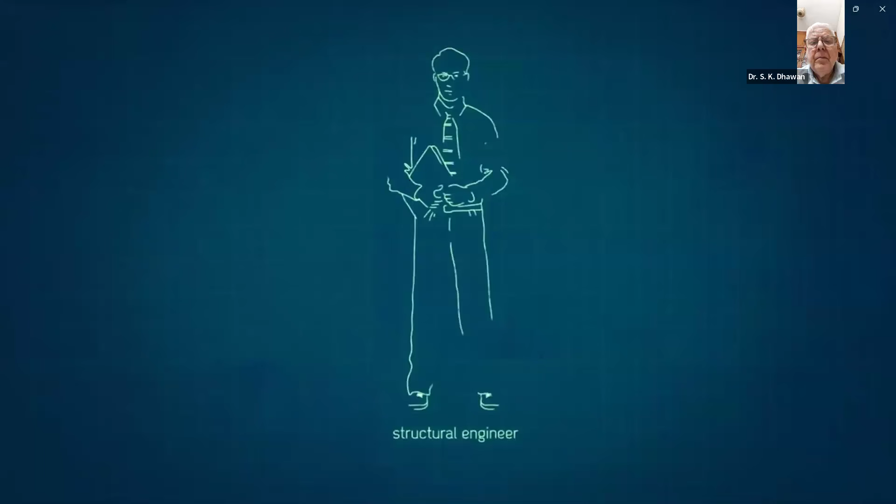The Indian Association of Structural Engineers, also known as IAStructE, was conceptualized and constituted in the year 2002 by a group of senior professional structural engineers from all over the country. IAStructE is registered under the Societies Registration Act 21 of 1860. IAStructE is a national apex body of structural engineers in India with a mission to promote the structural engineering profession and cater to the professional needs of the structural engineering fraternity. In the short span of 2 decades, the association has attained an eminent position in the professional field. Its membership is valued very highly in the profession.

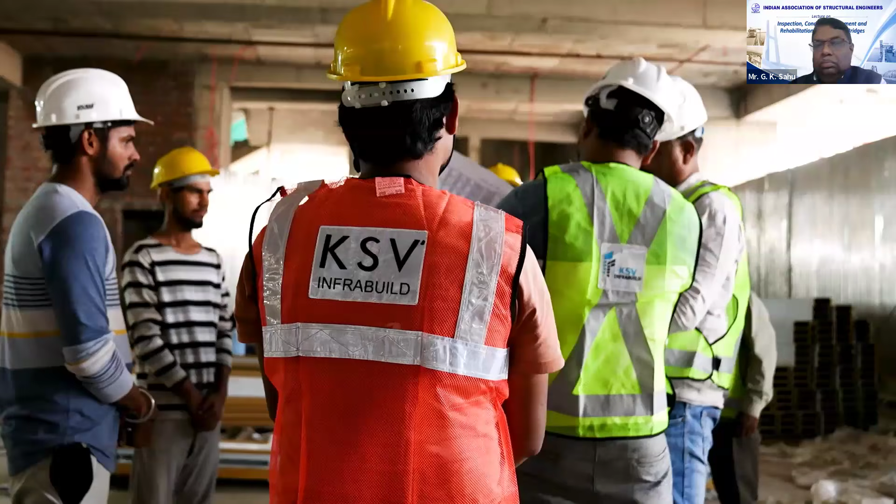Since inception, IAStructE has been led by eminent structural engineers like late Shri Mahendra Raj, late Shri Kumar Ghosh, late Shri Subhash Chand Mehrotra, Professor Mahesh Tandon, Shri Manoj Mittal, Professor R. Pradeep Kumar, and Shri Alok Bhowmick as its president. IAStructE is a permanent member of Engineering Council of India and interacts with the government on professional and policy matters related to civil and structural engineers. To expand its reach, IAStructE has collaboration with various international like-minded professional associations and institutions like IStructE, UK and FIB for strengthening global connections and professional exchange.

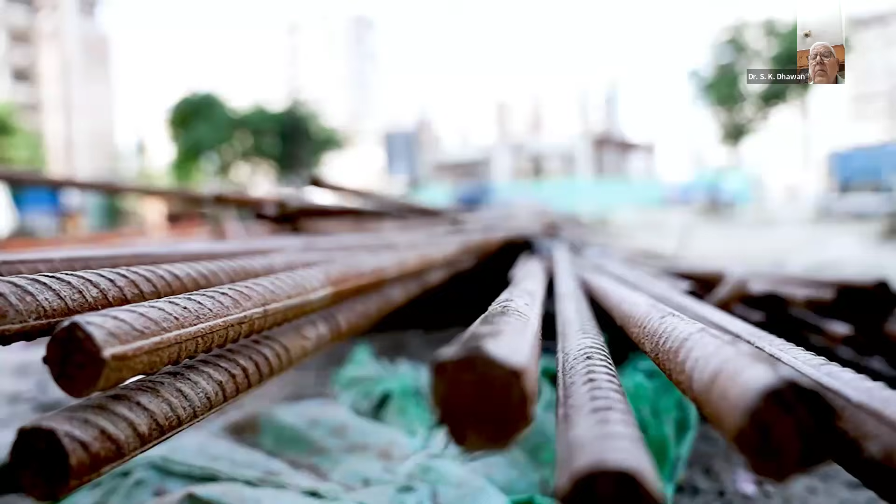IAStructE's prime objective is supporting and protecting the profession of structural engineering by upholding professional standards and acting as a mouthpiece for structural engineers in India. IAStructE endeavors to ensure that its members develop the necessary skill in structural engineering and work to the highest standards by maintaining a commitment to professional ethics and standards. IAStructE is actively engaged in organizing several continuing professional development (CPD) courses for structural engineers to help them update their knowledge and advance their career paths. It also conducts refresher courses for young and practicing engineers and student-oriented programs.

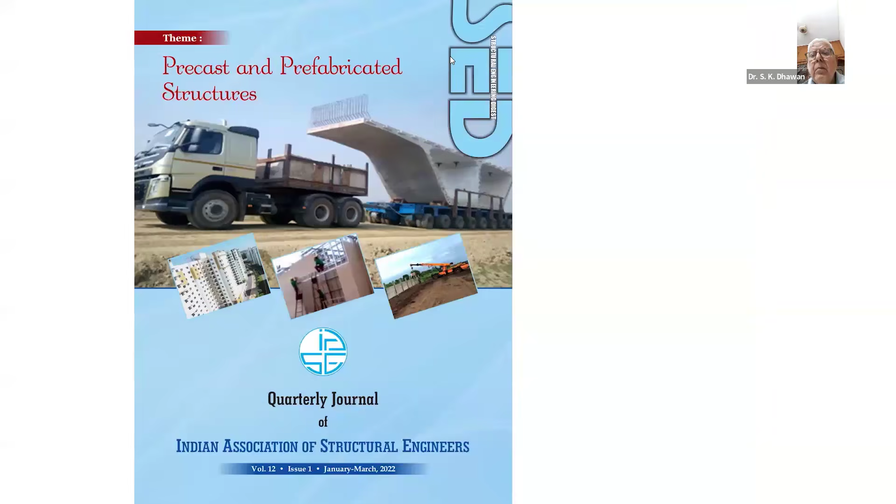Seminars, workshops, conferences, technical lectures and discussions related to the latest technological advancements and case studies are also organized regularly for members to enable them to continuously update their knowledge and skill set by interacting with the best minds from the industry. IAStructE's activities are widely appreciated and known for quality technical contents. IAStructE is also actively engaged in publishing its quarterly journal Structural Engineering Digest (SED), code commentaries, professional guidelines, monthly newsletter, and Crossfall, a unique quarterly newsletter that confidentially reports structural failures and the lessons learned from them. IAStructE's publications are becoming popular with time. IAStructE has representation in various technical committees of BIS and IRC as well. Its members are actively contributing to national code formulations.

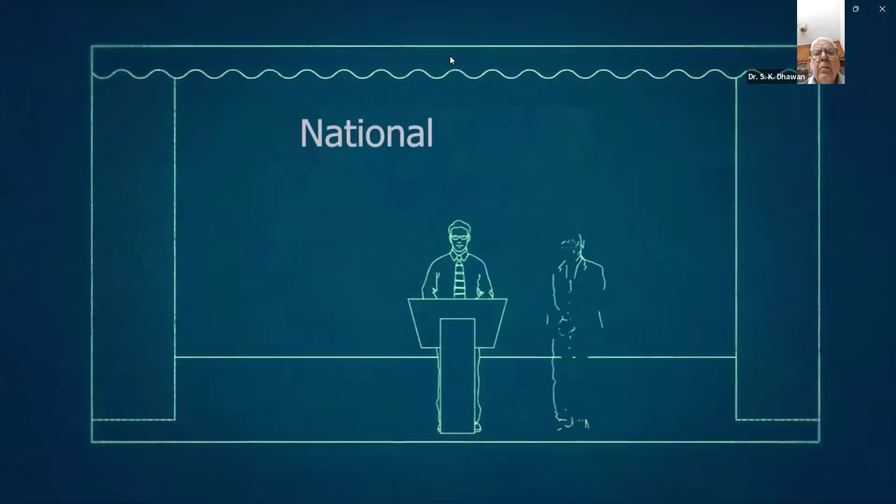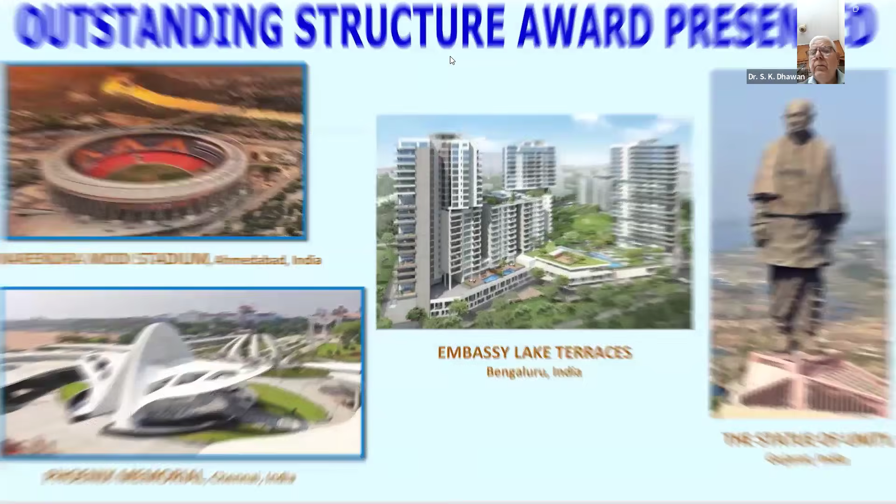In the year 2020, IAStructE started the National Awards competition to stimulate interest in the structural engineering field and to promote innovative thinking and creativity. The awards are presented to the winners in recognition of their outstanding contribution to structural engineering in the categories which include Outstanding Structure, Outstanding Structural Engineer, Outstanding Woman Structural Engineer, Promising Young Structural Engineer, and Best Master's Thesis in Structural Engineering. Reaffirming its commitment to professional excellence, IAStructE launched the accreditation program in 2023. This flagship initiative empowers practicing engineers to evaluate their competencies, identify growth opportunities, and strengthen the foundation for sustained professional success.

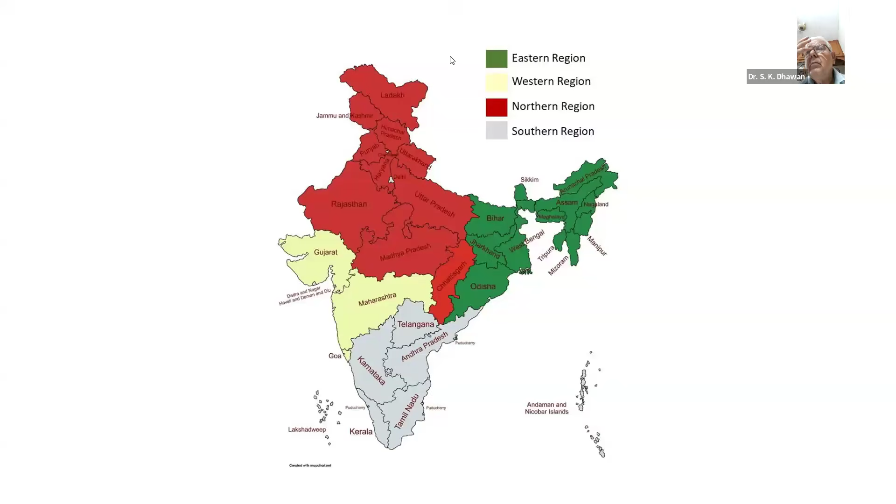IAStructE is currently operating from 4 regional centers, namely Eastern, Western, Northern, and Southern, having its headquarters in Delhi to inculcate the professional culture and provide hand-holding to the budding engineers. Joining IAStructE offers exclusive resources, mentorship, and networking with industry leaders. Members enjoy discounted registration for workshops, seminars, and events, along with discounted membership of FIB, opportunities for certification, career guidance, leadership roles, and enhanced professional recognition. IAStructE has its student chapters in several leading engineering institutions as well.

Membership of IAStructE is open to all civil and structural engineers engaged in the structural engineering profession. Members are elected based on their qualifications and experience in different grades as per eligibility requirements prescribed in the bylaws. Each application is carefully scrutinized before electing the members.

Changes observed in the performance since construction can serve as an indication of some sort of distress in the structure. Thus, instrumentation helps in monitoring the design parameters and in the assessment of the current health of the structure, so as to adopt proper remedial measures at an appropriate stage.

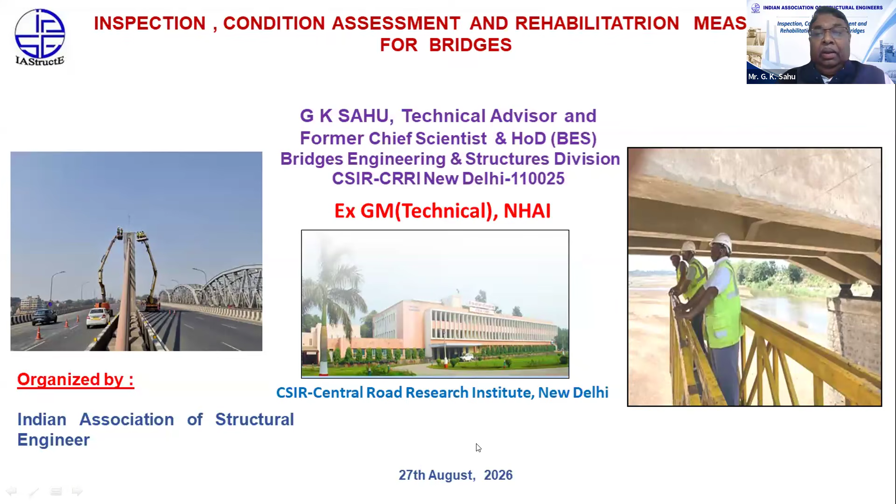Good evening, friends, I welcome all of you in this webinar. For any structure, before recommending anything, I request all of you to visit it at least once, for at least 1 hour. Only then kindly recommend anything, because relying on photographs or something similar will not give you a proper perception of the bridge.

As far as collapsed bridges are concerned, if you see the last 40 years of data, the average life of a collapsed bridge in India is 34.5 years. If you see the global scenario, it is 52 years. So we should all make a very good effort to contribute to enhancing the service life of these structures.

I request all the engineers, consultants, designers, concessionaires, contractors, and supervision consultants to kindly contribute a lot, so that we can enhance the average life of collapsed structures from 34.5 to at least 41, and then match the global scenario of 50 plus.

So in that context, if you follow this presentation for 1 hour, I think we will definitely be able to ensure, for our government, that we can get on par with global standards, that is more than 50 years average life of collapsed bridges. I'm going to cover introduction, inspection of bridges, distress mapping, condition assessment, and then recommendations for remedial measures.

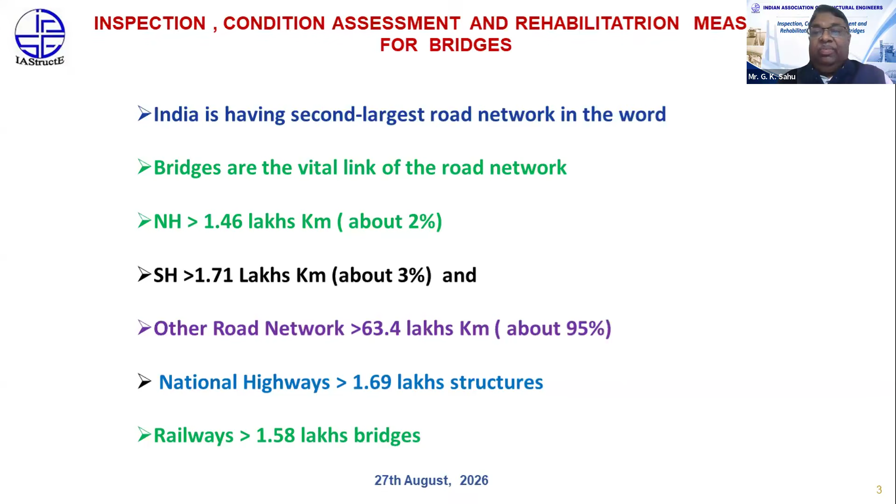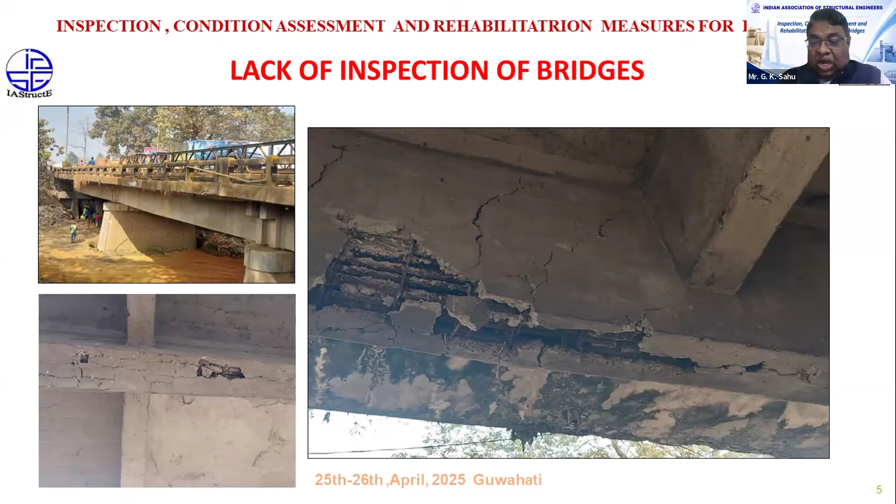I really request all engineers, whatever bridges they have in their charge, let us visit at least once a year. You can see this one.

In all the flyovers we see throughout India, there is shear punching of the deck slab, and it can be avoided if you inspect properly. This is the box girder case, or even for the simple deck slab, we are having shear punching problems in all the cities.

The thing is we are not seeing the structure at the beginning, unless we already have this type of very big potholes first, and then this type of shear punching of the area.

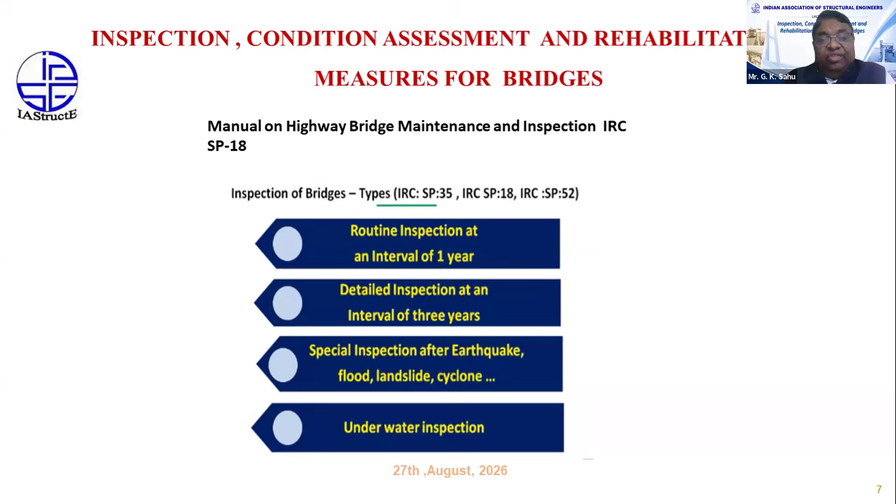If you go through IRC SP 18, it clearly indicates routine inspection at an interval of 1 year, detailed inspection at an interval of 3 years, and special inspection after earthquake, flood, landslide, or any major climatic changes. Underwater inspection is also essential.

IRC SP 18 provides that there should be a bridge register, but if you visit across India, you will not find 5% bridge registers. 90-95% do not have any record. And the records we do have don't give the details we intended, like the original bridge register and inspection report.

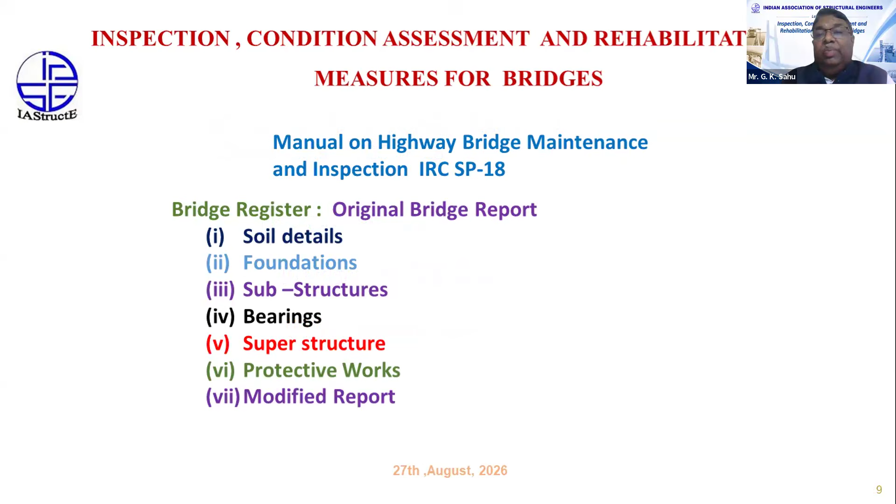The original bridge registers should have all the original data: soil details, foundation drawings, structure, substructure, bearing details, superstructure, and protective works if anything got modified in between. All those things should be in the original bridge register reports.

Whenever you are inspecting, there should be some remarks for that particular bridge. But this is missing at all the sites, I can say, because only within 5% will you get this, 95% you will not. You have to inspect all these components during inspection.

That includes superstructure, wearing surface, deck slab, whatever supporting T-girders, I-girder, box girder, footpath, substructure, bearings, pedestal, bearings, abutment foundation, pier foundation, wing wall, retaining wall, dirt wall, and non-structural elements also: approach slab, parapet, railing, crash barrier, expansion joint, protective works, and waterways too.

You will find in 70% of cases, the waterway is not clear. In 95%, the drainage spout is not working. The bridge number is missing in 99% of cases. Utilities have no provision in 99%; we are just providing some afterwards.

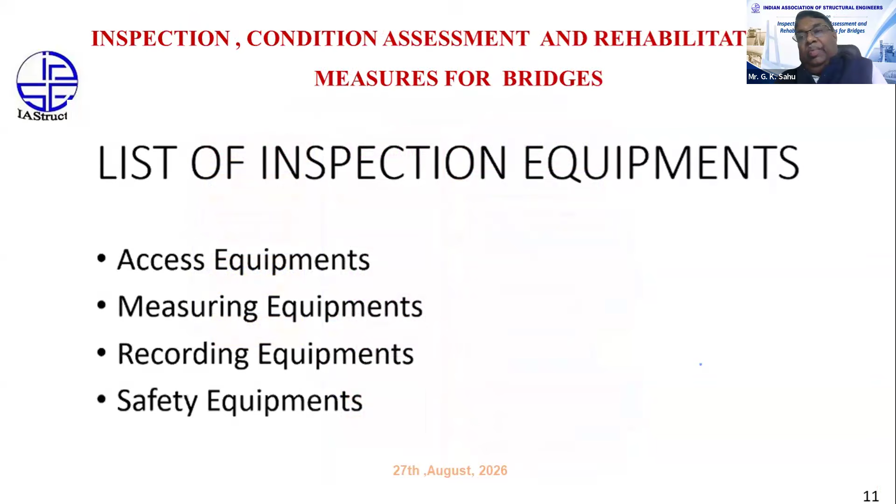Whenever you want to inspect, you should have these things: access equipment, so that we can see all the components properly, measuring equipment, recording equipment, and safety equipment. These four things are required whenever we want to visit or inspect a bridge.

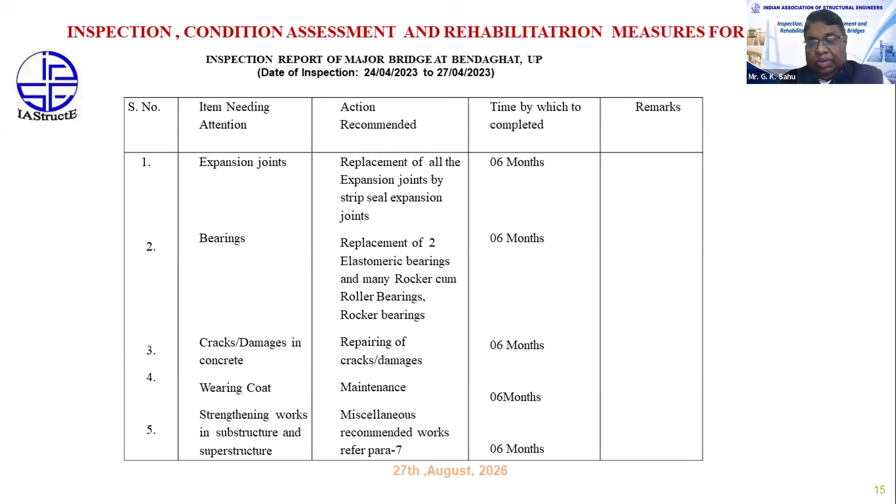After inspecting, you have to give some plan: yes, these elements should get rectified within a prescribed period of time, just as expansion joint, bearing, crack, damage, wearing coat, and strengthening works. We have to specify this according to the severity of the condition of the bridge.

Then you have to give one certificate stating that our team has visited on such and such date, and you have to certify it.

If you see the inspection accessibility requirements, we need mobile bridge inspection units, man lifters, ladders, sometimes drones. Sometimes inspection trolleys if a cable stayed bridge is there, boats, rafters, and if you want underwater scanning, then some robots and some divers. So these are all accessibility options.

You can see we are having this mobile bridge inspection unit. Yes, there are 3 arms: one horizontal, one vertical, and one will go at the bottom. This is one type of mobile bridge inspection unit, a complete platform, so we can call it platform type. And there is a bucket type, the second type, where just 2 or 3 persons can go and see. Here flexibility is there, more persons can go and work peacefully. So this is mobile bridge inspection unit.

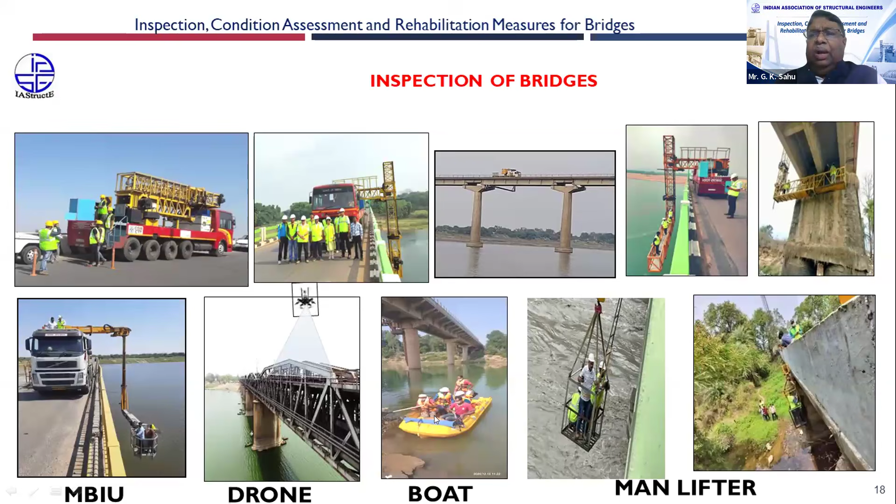Sometimes we are using drones also. Sometimes a Hydra with a moving platform, that platform can go down and we can see from the bottom. So that can be done. Sometimes we have to use motor boats. Whatever the means, we have to see the bottom of this structure. The main motto is, let us see the girders, deck slab condition, bearings, bearing pedestal, pier heads. That is our main motto.

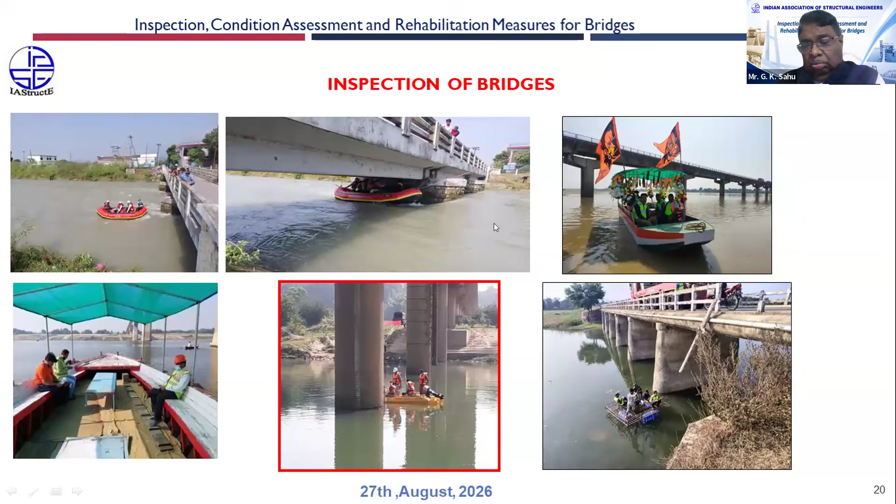So sometimes you need this type of arrangement also, because some mobile bridge inspection units will not work since the space between these members is very, very less, what is required for that particular mobile bridge inspection unit. In that case, Hydra and this moving platform will work. Sometimes you need a boat, motor boat, any type of boat you can have. Sometimes even rafters you can use. So by any means, we have to see the structures.

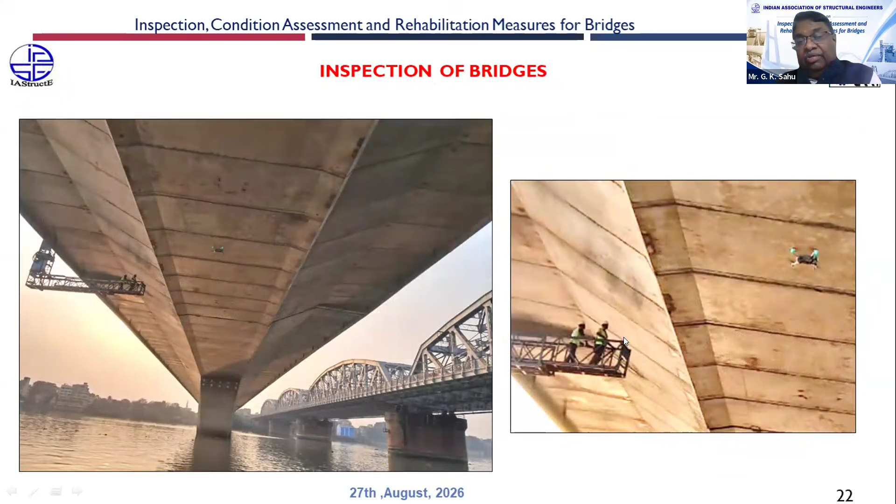If this type of structure is there, then you need very good man lifters. You can see if height is 20 meters, 25 meters, then the lifter quality should also be very good. You can also have mobile bridge inspection units, and you can also have drones, so that you can see all the components. Sometimes you should go with a motorboat also, so that we can have a look at the condition of the pier, and also some NDT work can be done.

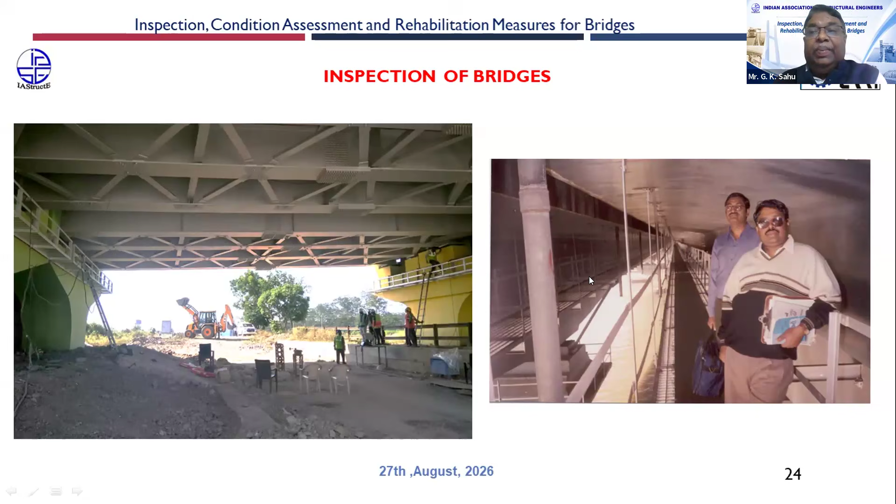So we should provide something, because always having a mobile bridge inspection unit, or man lifter with hanging platform, is not always possible. If you provide this type of walkway, then inspection will be very easy also, and economical also. Earlier we had to go like this, then inside, whatever the 10 meter, 12 meter height is there, we had to use this type of ladder. Then this mobile bridge inspection unit we started using around 2010 in India.

Yeah, it is really very comfortable. You can have this type of one horizontal arm, this is the vertical arm, then again a horizontal arm, and it will move between pier to pier. The whole span you can inspect, then again turn it 90 degrees, and it will go to the next span. So it is really very easy using the mobile bridge inspection unit.

We have to also take care that there should be some inspection hole in the box girders particularly. Sometimes we are not having any space to go inside the box girder. You can say these two box girders are only having 1 inch or 2 inch space between the girders.

And so you can't go inside, and we have to make provision to go inside of the box girder, because it is very much essential to see what is the condition of the deck slab from the bottom. From the top, we can't see it due to the wearing coat. But if you go inside, sometimes you will find something like this. And if this is the condition, then definitely shear punching will be there in the deck slab.

You can see here, this is a really very beautiful arrangement, accessibility you can say, to have a look at the bottom of the girders, box girders. You can see any bearings, you can see the cracks on the webs, you can see the cracks on the soffits, everything you can see.

If this type of bridge is there, you should have a mobile bridge inspection unit. You should have a man lifter also, so that some span can be covered from this man lifter and hanging platform. And to go and see the pier condition and do some non-destructive testing, we require a boat also. And you see the pier head, that pier head is around 7 meter, 8 meter in that case. If this has a span of 130 meters, meaning 65 meters on this side and 65 meters on this side, this height will be 6 to 7 meters.

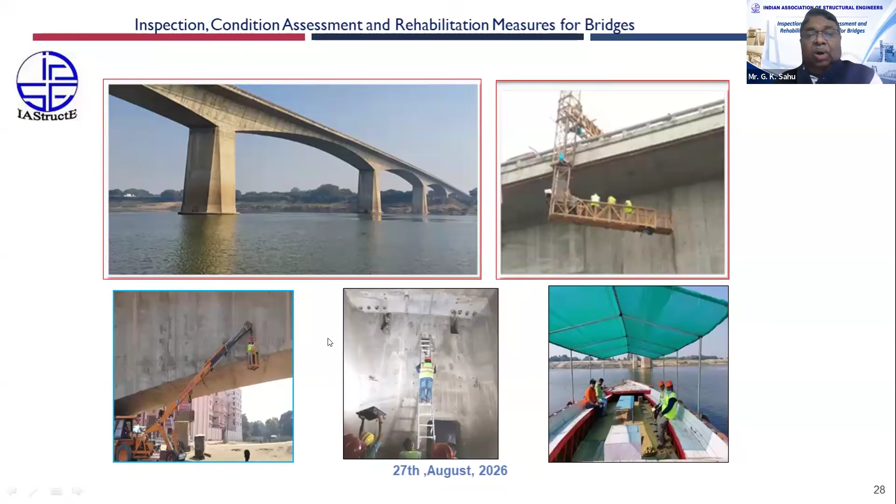Then a very big ladder is also required inside the box to see the condition of the diaphragm, because sometimes there are many cracks in the diaphragm also. So all these things are required to inspect the structure.

But really, for the last 20 or 30 years, we are not maintaining anything. Even the drainage spout and expansion joint, these two things are really very dangerous for the condition of the bridge. And we are not maintaining them for 10 years, 25 years, 30 years like that. So that is the main contributor towards the deterioration of the structures.

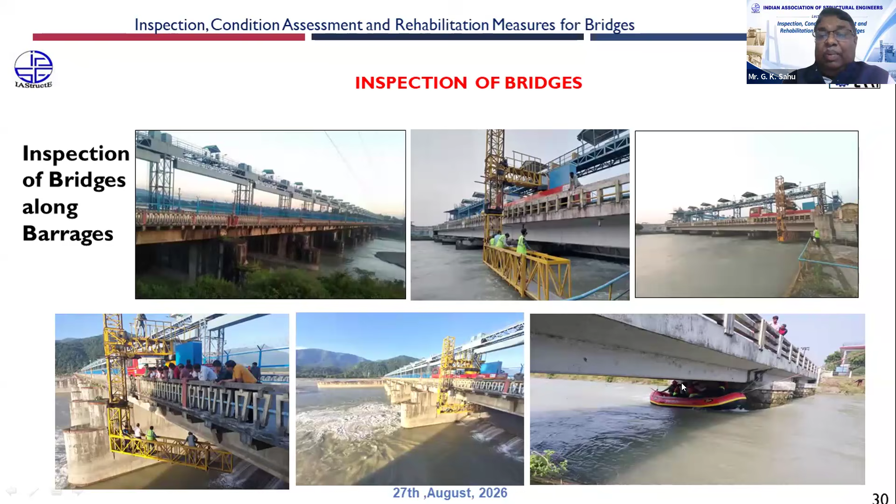You can have a mobile bridge inspection unit and you can monitor any structure, even some barrages. Yes, we can monitor. You can see here we are using a raft to see the bearing condition and the bottom of the girders, the bottom of the deck slab. So you have to have something to see the structures.

Nowadays, 4-lane, 6-lane, 8-lane structures are there. Sometimes there are 2 carriageways with different support conditions. In that case, to save time, we can put our mobile bridge inspection unit in between both carriageways, so that once you can see the right carriageway, and in the other case you can see the left carriageway. So this is also a good way to save time.

You can see the bearings on both sides, but the provision should be there in the mobile bridge inspection unit. In some mobile bridge inspection units, this type of rotation is allowed. In some, this right movement is not allowed. So that depends on what type of facilities and provisions are there in the mobile bridge inspection unit. But it is very good if you put it in between, and in both arms, not a very big angle, around 15 degrees, in general the movement is allowed.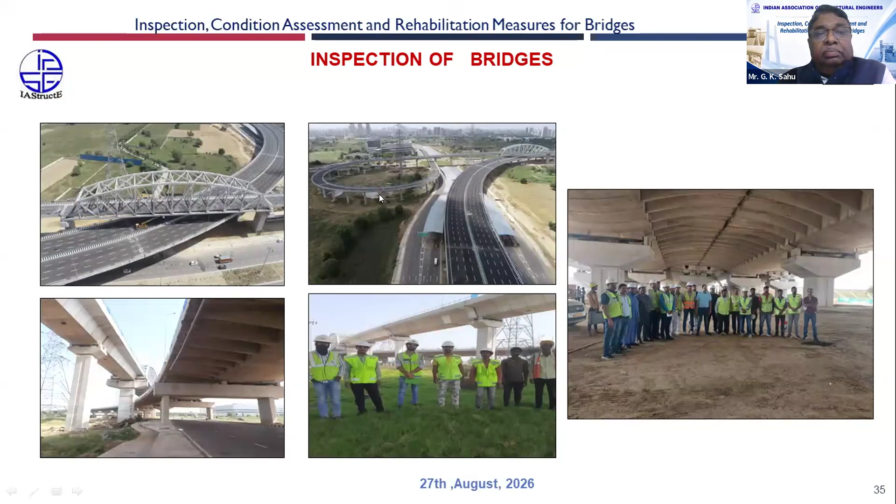Yeah, this is inspection of Dwarka actually. So you have to go really inside the bridge, then only we can. This is our senior colleagues. Even Dr. Pal is there at that time.

He also visited. I request all the engineers kindly go through this Dwarka Expressway. Really, it is a very good structure and you can enjoy. But not from the top. You should come through the service lane only, at the bottom. If you are going from the top, you will not enjoy the Dwarka Expressway.

We have to go from the bottom, and even you can have a look at the tunnel there near the airport. Very good tunnel. So all the civil engineers should visit these structures. Yeah, this is that tunnel actually. Just there we were doing the structural safety audit at that time.

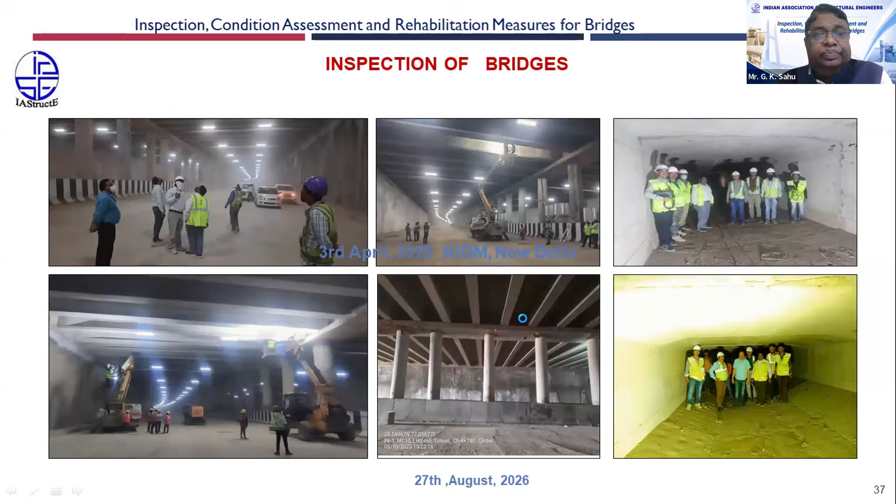If you see the causes of distresses, there may be 3 types: design stage, construction stage, and service stage. Design mistakes may be loading specification, material specification, design codal provisions. Sometimes all are good, but drafting mistakes are there. In drafting, instead of say 22 mm or 32 mm dia, only 12 mm dia is written. So you have done very good design, but let us have this also in consideration. Before issuing a drawing, let us check drafting mistakes.

Then construction stage: yes, poor construction practice, lack of concrete cover. Sometimes we are getting zero cover, or the cover is only 0 to 15 mm. Poor compaction, that is also there. Inadequate curing. So all these things are coming. Lack of quality control. Nobody is going there to see the RMC plant.

If you ask, they are just telling we are taking concrete from the RMC plant. But they don't know how it is coming, what is the slump required at the RMC plant, what is required at the site, and how they will maintain it. Those things should be seen. Otherwise, really very difficult. Whether they are adopting moisture correction factor for the aggregate, sand, etc. Those should be seen. Insufficient site supervision, people are not having time to see what is going on at the sites. So this is a really big problem.

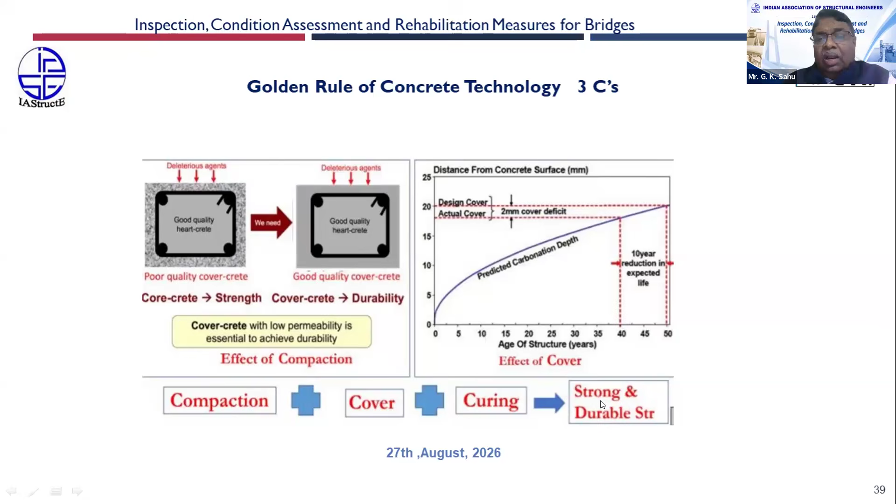And the minimum thickness provided is 200 millimeters, but at the site, if you measure after taking 6 cores, you will find the average thickness is around 160 mm in this case.

So minimum 200 millimeter deck slab thickness was required, but average is 160 mm, and there is no proper compaction, no proper curing, no proper cover, no proper mix design, then this will happen. So within 1.5 years of age, before 2 years, this bridge is having this condition. So conditions were such that shear failure, you can say, took place at many locations.

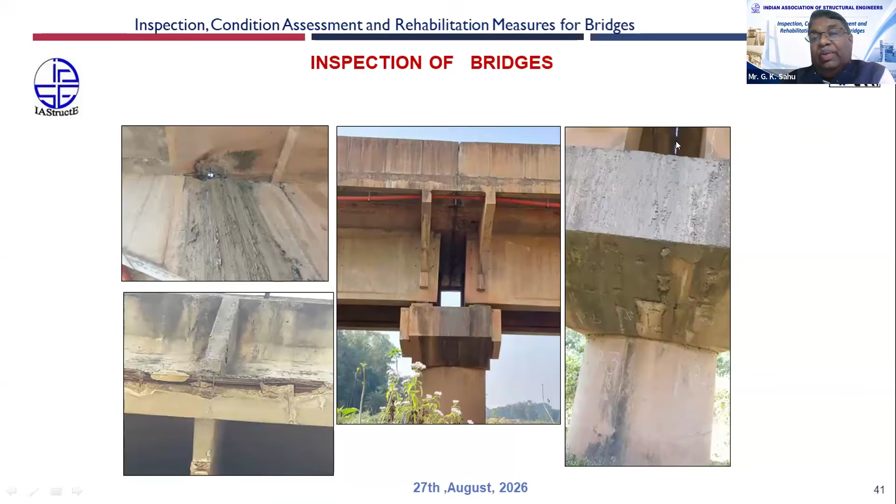You can see it here. There is no projection. Let us have some projection on the drainage spout at the bottom. It should be like this one, just adjacent I have shown. So if some projection is there, then this will not happen. So this we should really adopt.

You can see this is the condition. There is no projection. After 5 years, you will find this type of spalling, and after 10 years, you will find this type. After 15 years, the pier will also get cracked, and after 20 years, the whole flyover or bridge should be demolished. So in many structures we are finding before 25 years, the weathering action is so severe that you cannot consider rehabilitation or repair work. You have to demolish the structure.

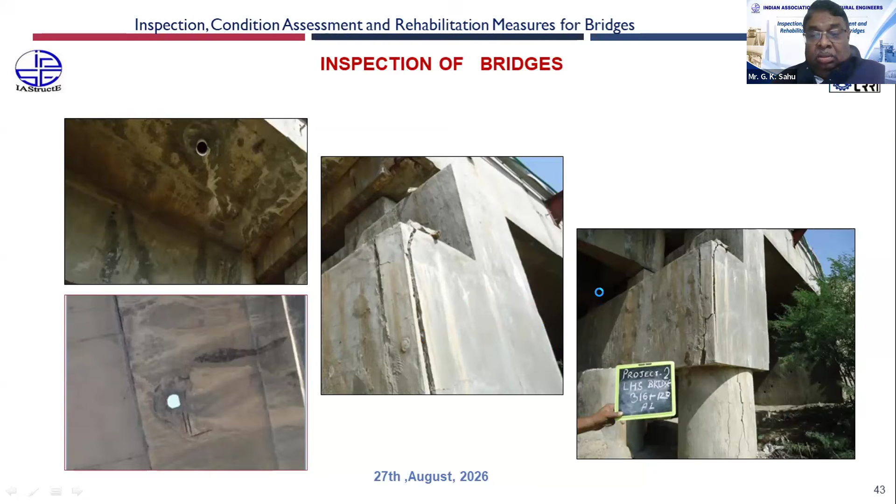And this is only due to two reasons. We are not maintaining our drainage spouts and expansion joints. Only a very small thing, but a very great contributor towards faster effect of weathering action. In 90% of bridges, you will find there is no structural problem. We are having only a weathering action problem, and that is predominant. The condition is so severe, sometimes we have to recommend, yes, let us demolish this. Only in 10% of cases will you find a structural problem.

You can see we are not maintaining the expansion joint, say at the beginning or end of the bridge. Then what happens? You will find this type of erosion of soil from below. And sometimes if there is a solid type abutment on a shallow foundation, you will find tilting of that foundation also. So we are neglecting expansion joints, and we are creating this type of problem ourselves.

Sometimes we are taking decisions. Earlier there were steel railings. All of a sudden it was decided, let us have crash barriers. But these brackets were not able to take the force, the load coming through the crash barrier. And due to that, the whole crash barrier fell down.

So actually before alteration of anything, we have to see whether whatever load we are putting on the structure can be sustained or not. So that should be there. Otherwise, it is very difficult to have stability of the structure. And sometimes this type of failure happens.

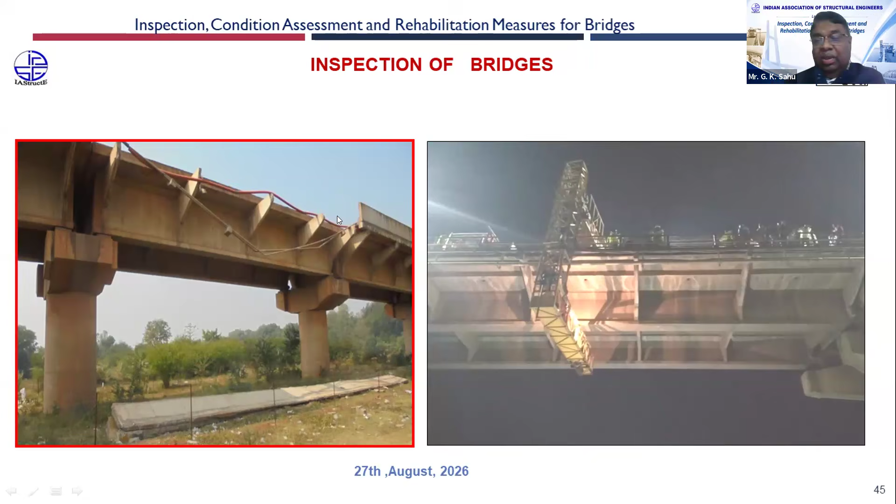Sometimes you have to see the bearings, elastomeric bearings, and if a bearing has this type of cracks, it means the elastomeric support is not good. You can reject this type of bearing. If cracks are there and bulging is uniform, okay, from bulging there is no problem in this one, but the cracks are there. So this should be rejected.

If bulging is uniform, that is allowed. But if bulging is local, this is locally bulged out. This is not allowed because the bonding between this steel plate and this elastomer is lost here. Due to that, this is the local bulge. So this also comes in the category of failure. So these two cases we can reject.

And the third case is if there is too much shear, say if thickness is 100 mm and shear is more than 50 mm, you can reject that one.

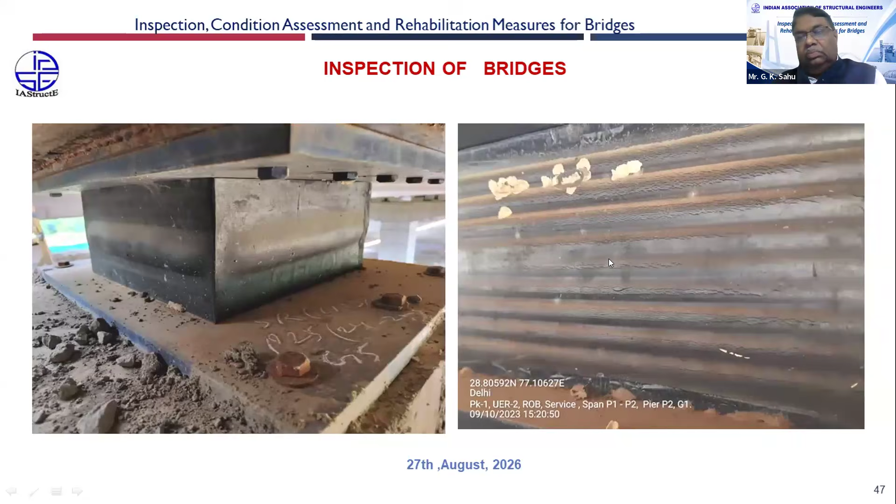So three cases. Sometimes you are not taking precautions with whatever instruction is given on the drawing, say first stage of pre-stressing within 7 days or having strength of concrete so and so. After 14 days, having strength of concrete so and so, second stage of pre-stressing. After 1 month or after 45 days, third stage of pre-stressing. That we are not taking care of.

And you see, in this case, at the age of 30 days, the pre-stressing was not done. And in the morning, 5 a.m., a tractor trolley came here, hit the scaffolding bar, and within 2 hours, this box girder collapsed. So if the pre-stressing had been done at that time, this could have been avoided.

The reason is that they had not done any pre-stressing even by the 30th day. All things were there, jacks were there, pre-stressing cables were there. Only the pre-stressing activities had not been done. So one tractor trolley hit that supporting cross, and within 2 hours, the whole girder collapsed.

If you do the back analysis, if you remove the 7 posts from the center, you will find that this box girder is not able to take its own dead weight. So that was the reason. That's why whatever pre-stressing instructions are given on the drawings, we should follow them.

So there were around 350 bridges, and they are scattered. Say there are 40 divisions, and you will find in some division 10 bridges, some division 15, some division 3 bridges, some division 5, like that. You can see very big bridges are also there, major bridges in Odisha.

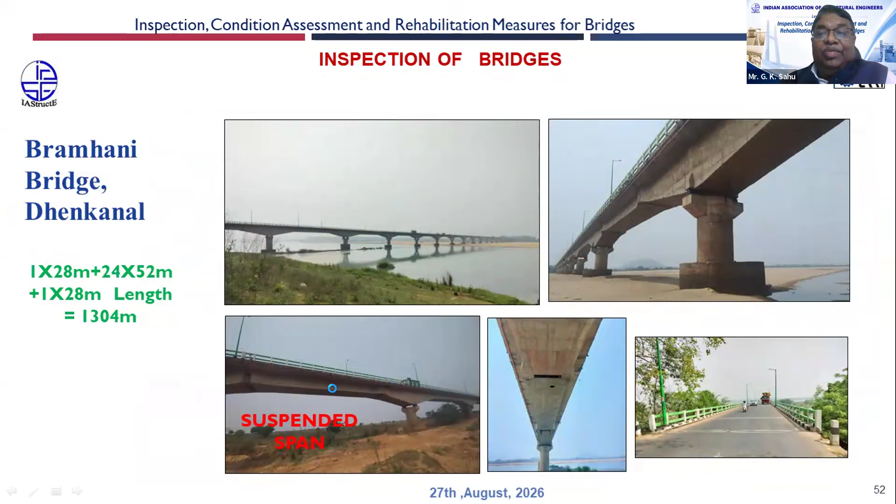Yeah, this is the Dhenkanal bridge. You will find all types of structure there. Suspended span is also there. Balanced cantilever is also there. Simply supported is also there. Yeah, you can see the cantilever type, suspended span, simply supported. So in one bridge, we'll find all types of structure.

Really, on seeing it, it looks very beautiful. But in a suspended bridge, inspection is difficult. How to go inside? You will find only 2 holes at both the ends, and from those we have to go. So through a mobile bridge inspection unit, you can come like this. Then through that hole we can go inside, and there we'll find this, so that we can go to both sides.

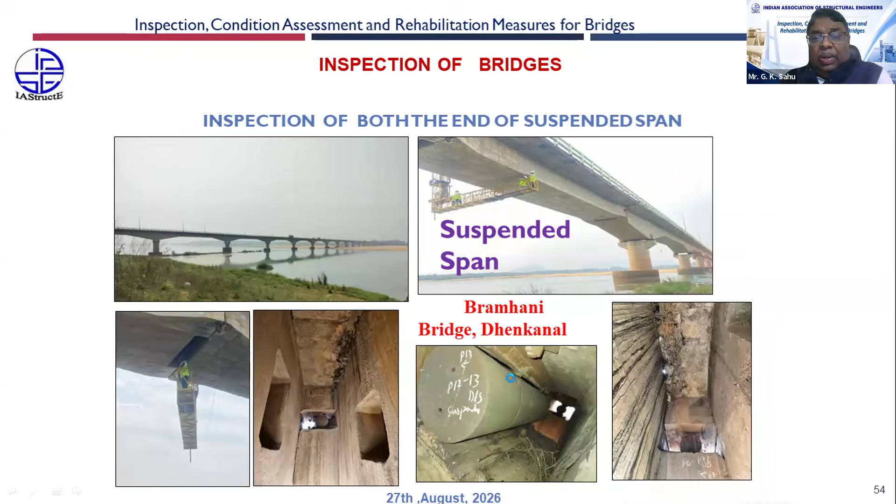One is the suspended one, the second is the cantilever, continuous cantilever. And there we can see whatever bearing system is there, and you can see inside also. You can go inside and see the box girder cracks in the deck, web, or some shear punching already there, or some that is going to happen within 3 months or 6 months. So all these things can be inspected.

Yeah, you can see these are the conditions of bearings and supports, and sometimes in bearings, almost all over India, not in a particular bridge, actually there are 2 types of temporary supports. One support we provide during installation at the site, and one temporary support is provided by the bearing manufacturer, so that all the elements are properly taken care of up to installation.

But in 95% cases of bridges, we will find that whatever the temporary supports provided, just like this one, wooden blocks, that is not removed even after 50 years of age of the bridge. It means we are not giving any priority for this work. In 50 years, we are not having time to remove this temporary support, whatever we have provided during installation of bearing. This should be removed before allowing the traffic.

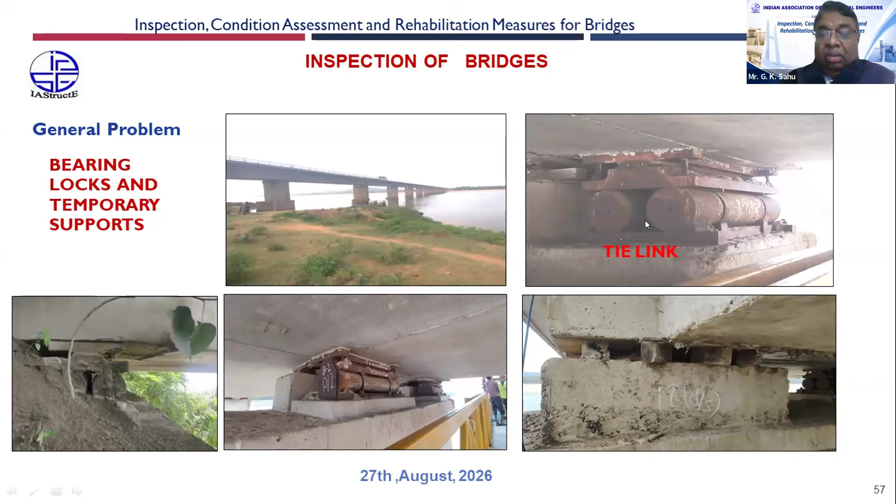That's why I'm telling, 90% of load tests we are doing are useless. If the bearing is not working in 90% cases of bridges, how are we doing that load test? Whatever the load test is, that is useless. So one should see whether your bearing is working or not. If not working, then first make the bearing work properly. Then only the load test should be allowed.

You can see here, this is a roller bearing. Okay, very good, the tie plate is there. But you see, there are no anchor bolts on both the sides. Here also no anchor bolt. Here only one bolt is there. There is no nut also. And I don't know about that side; that side maybe also the same thing. So at least the anchor bolts one can see.

You can see here for this rocker bearing, this bolt is too long. It is restricting the rotation of the rocker. And it is in all bridges, not only this one I am showing. In all bridges, you will find it like this. Here you see the bearing manufacturer has provided just one plate.

This temporary plate should be removed, but after 40 to 45 years of the bridge's age, this plate is still there and has rusted due to continuous pouring of water through the expansion joint. Also, the temporary support provided by the bearing manufacturer has not been removed. We are not having time to inspect our structures. That is the main reason.

Sometimes you can see this type of cracks in the deck slab, and this clearly indicates that you will have shear punching within 3 to 6 months. If stark radial cracks appear, then there will be mapped or spider cracks all around, clearly indicating that within 3 months to 1 year, you will have shear punching.

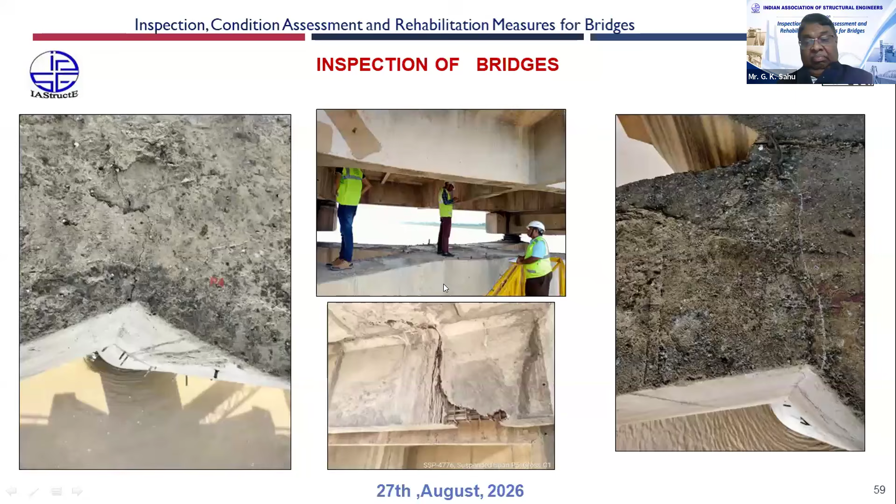In this case, there are 4 cantilever arms supporting the main girders. You have to see what is the condition of this crack, what is the depth of this crack, what is the width of this crack, so that we can save it with proper strengthening work at the proper time.

You can see here also, the temporary support has not been removed, whatever was provided by the manufacturer. Instead of a tie plate, there is a tooth plate also—this is also allowed, with both vertical tooth plates. Here, the translation is through rotation: this tooth plate will rotate and the whole girder will move longitudinally. This is also allowed.

But here you can find one tooth plate is missing, and here you will find some nut bolts are missing. These things should be seen during inspection. Here you can find that nut bolts are missing. Here, the tooth plate is missing. Here you can see the bearing pedestal is cracked.

Here you can see temporary support is there in the rocker bearing, so the rocker bearing movement is restricted. These things should be seen.

I request all the designers to kindly have this height lowered. This should be at a comfortable height, around 1 feet, not 1 meter. If someone has to inspect the box girder, he has to take 2 ladders and only then can he see, and this ladder has to be taken twice to move from one girder to another. So I request all the designers and approving authorities to kindly have this point noted—this should be at a comfortable height so that one can go and inspect.

In this case, we will see the inspection hole is only 300 millimeters. Then how can one go inside to see the structure? That should also be taken care of—it should be minimum 600.

One thing should also be remembered: whenever you are doing widening cases, let us also strengthen the old bridge. You will find that widening has been done and work is going on for the new bridge only, but we are not even having a look at the old structure. What is its condition? After 2 years, we have to demolish it again.

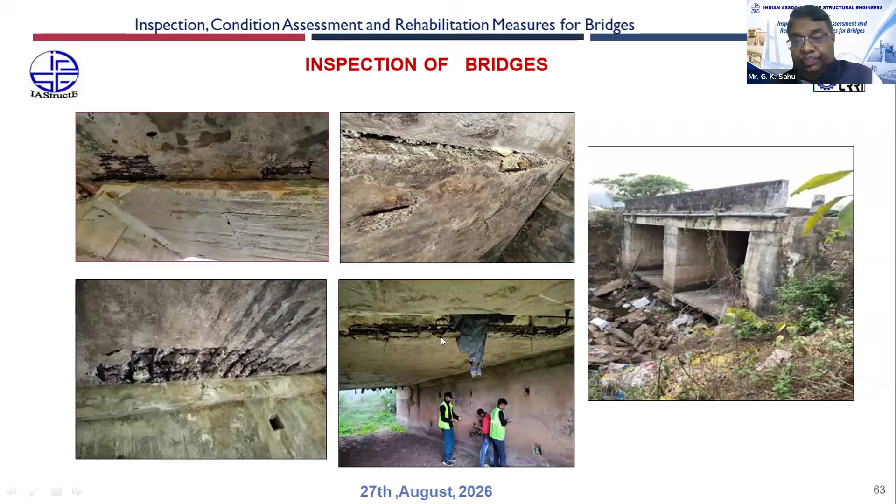If that is the case, you have to take up some strengthening work for the old structures also before taking up the widening. But in 90% of cases, we find that the widening work has been done while the old structure is badly, severely affected and should be in the stage of collapsing sometimes. So that should be taken care of.

In many structures, you will find too much honeycombing at the bottom. If you just hammer it, you can have a look at all the reinforcement—what is the diameter, how many reinforcement bars at the bottom layer, how many layers are there. So the concrete is not reaching up to the bottom. That is also a reason for failure.

Many bridges are having this condition all over India. I am not talking about a particular bridge because I have inspected more than 3,000 bridges across India, and I really found that in almost all the states, you can see the same thing: temporary support still on the bearings, and this type of honeycombing. Same thing everywhere.

You can see, if this is the suspended span bearings, we have to see properly. If one end is having it, in this case I have seen the next end is not having it. Here you can't see - this is the photo from the next side. There you will not find the tie plate.

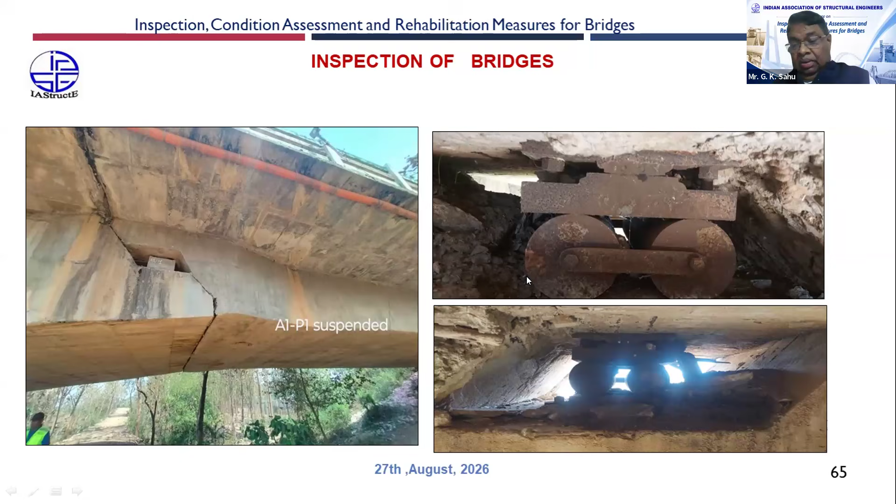For 30, 40, 45 years our expansion joint is leaking, and this is in very bad shape. This has totally moved, and the whole suspended span is just lying, resting on the cantilever arm. Meaning the bearing is not effective. So really we have to do inspection, otherwise it is very difficult.

In many cases you will find this type of bearing at this stage - cracks, local buckling, bulging. So in that case, if this is the condition, we have to replace the bearing. Then you have to do the whole operation - lifting the structures through jacks, putting new bearings.

Generally, due to leakage of water, you will find this rusting effect. And for elastomeric bearings, you will find this type of cracks at a very young age. Generally we think elastomeric bearings will last 15 to 20 years, but within 5 to 10 years you will see this type of condition in many bearings. And if the expansion joint and drainage are maintained, in some cases even at the age of 40 the elastomeric bearing is working and we are not recommending replacement.

So you see, the expansion joint and the drainage spout - these two things we cannot maintain. That's why these weathering actions are too fast.

You can see how the bearing can be replaced, and it is a very, very difficult operation. In some cases you are neglecting the grade of concrete in the bearing pedestal, and due to that you will find crushing of the bearing pedestal took place, and we have to remove and replace the bearing. Sometimes we think we need only a very small quantity and we put any grade of concrete in the bearing pedestal - this may lead to this type of failure.

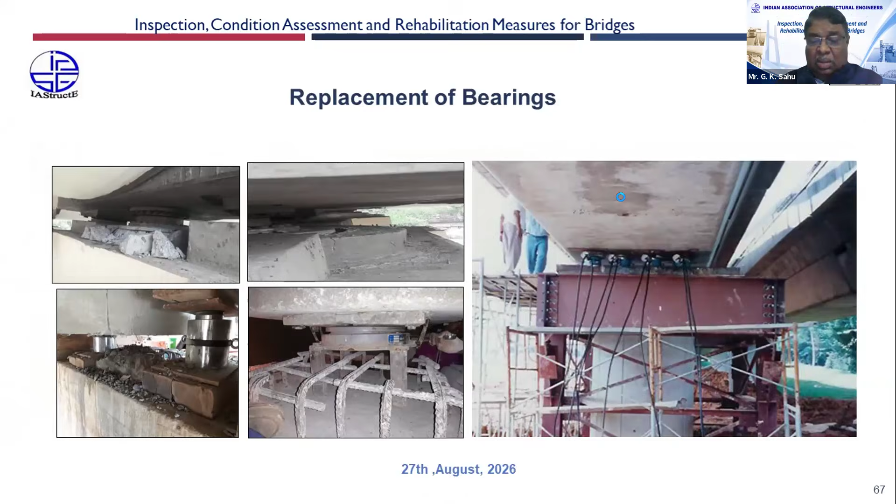Here you can see this type of bearing is there - this is roller rocker only. This roller has various 4 rows of rollers, 3 rollers in each row. This is also roller type, but this is cut roller - known as cut roller, only a small segment. So sometimes we can call this a segmental roller bearing - rocker-cum-cut roller or rocker-cum-segmental bearing.

So this should be seen actually from about 1 meter, 1.5 meter distance, and we have to do NDT also during inspection. The standard tests are rebound hammer, UPV, and some core samples also, cover meter tests also, carbonation tests also.

And I request all the engineers - from the rebound hammer, don't recommend the crushing strength of the concrete. Some people just say, oh sir, very good result, rebound hammer 45, 50 is coming, it is very good. No.

Rebound hammer is only reflecting 1 inch cover hardness. So unless you are having some cores, don't comment about the strength of concrete, the grade of concrete. This is really a blunder mistake. And I am finding intentionally people are not taking cores, and with rebound hammer they are recommending the crushing strength. It is really a horrible situation.

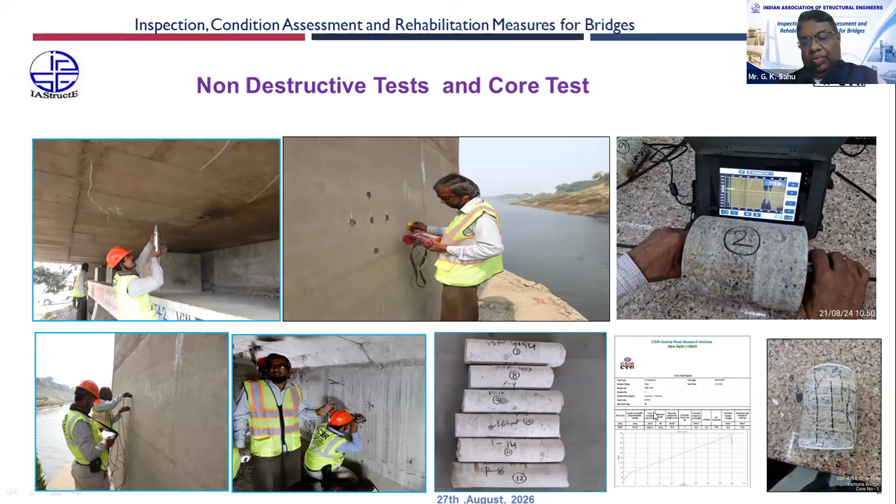You can't give any grade of concrete unless you are having it supported with a core value. Then we can take a correlation - if this is the rebound hammer value and this is the core strength near that one, then we can correlate. For other parts, if you are not taking cores from other parts also, then you can have it. Otherwise, based only on the rebound hammer value, you should not comment about the strength. For carbonation, we are also taking tests at the site.

Sometimes you see the bearings - they have a bearing pedestal, and you can see all the sizes of the bearing pedestals are different. And sometimes at the third location, the bearing location - single bearing - is also not centrally placed. So negligence is really leading to some collapse there. Sometimes you will see vegetation grow too much - that should also be avoided.

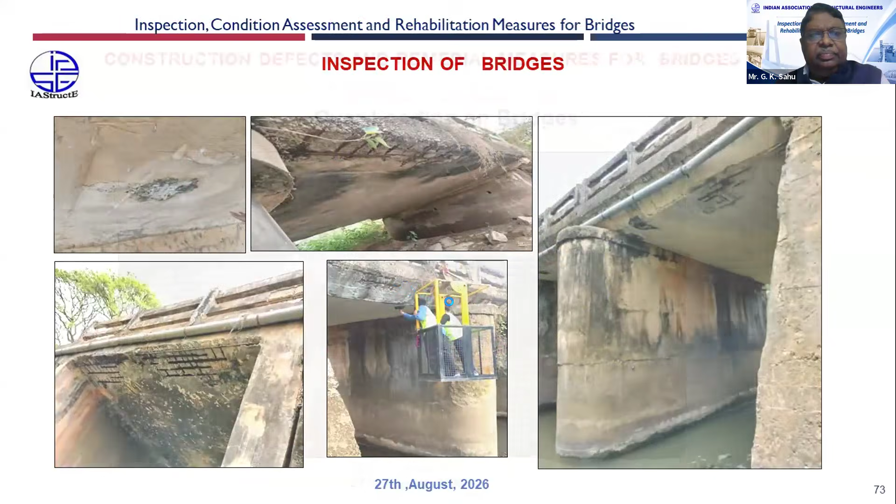This is general weathering action, and sometimes overloading in case of mining of sand or aggregates. You can see gross weight in 3XL trucks of 50 to 60 tons, around 2 times more than what is allowed. In 4XL it is 1.5 to 2 times what is allowed, and in 5XL also about 1.5 times more than allowed. So in mining areas, people are taking 1.5 to 2 times the gross weight allowed. That is also one of the reasons for damage.

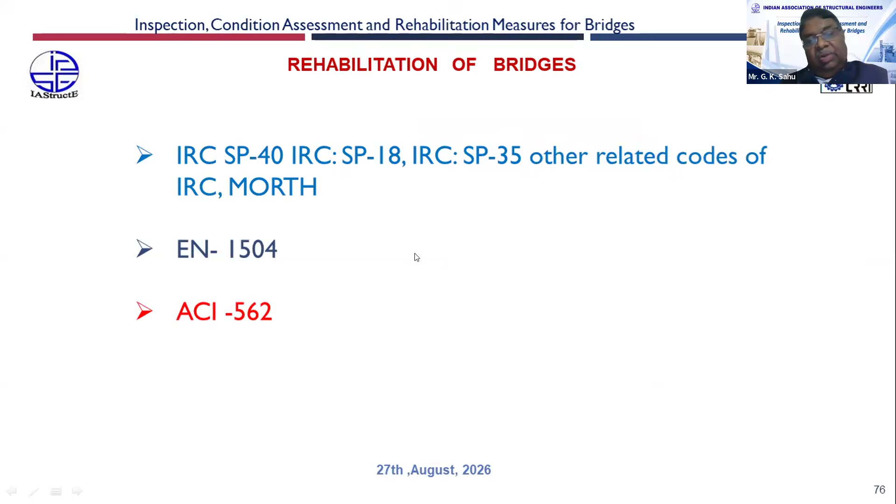If you want a rehabilitation scheme for any bridge, these are the good codes: IRC SP40 for Indian scenario, European code EN 1504, and ACI 562. If you want really good knowledge, go through EN 1504, which has 10 parts, all well defined in different themes. One should go through all these 10 parts to have very good knowledge.

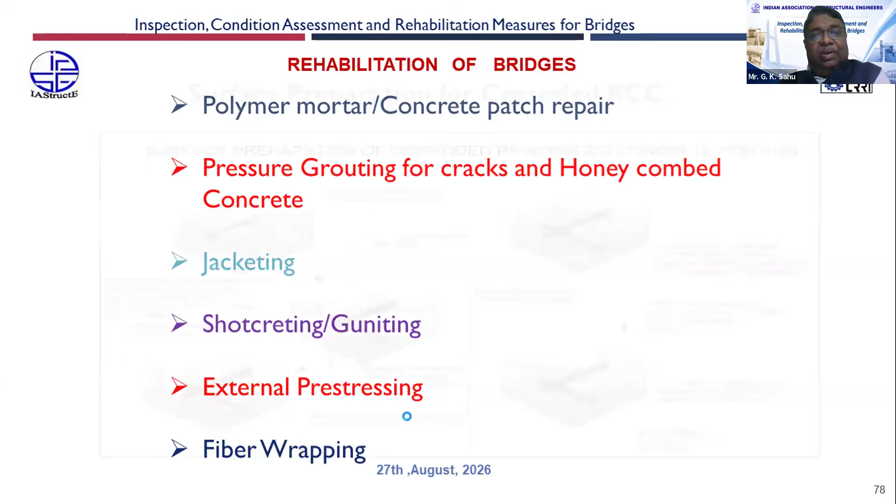You can find these are the prevailing practices we are generally adopting in rehabilitation: polymer mortar, concrete patch repair, pressure grouting for cracks and honeycombed areas, jacketing, shotcreting, guniting, external pre-stressing, and fiber laminates and wrapping. These are the general practices for rehabilitation. But the surface preparation should be proper, otherwise it will not work.

If there is corrosion, we have to expose up to the reinforcement level, and beyond that at least 1 inch, so that it is properly cleaned. After cleaning and rust removal, whatever concrete is poured should have good contact with the parent concrete. That should be done properly.

Pressure grouting we generally use for cracks, and also for honeycombing areas. If body honeycombing is there, or in cracks, you can see this type of work where pressure grouting will help.

Jacketing we sometimes do, but if it's just weathering action then 100mm jacketing is okay. In weathering action we find vertical cracks, not buckling of the pier, so in that case we can do jacketing work. Per column we can see this type of work can be done.

Sometimes shotcreting, guniting we are doing. Sometimes external pre-stressing, where you have to have provision for diameters also, for anchoring of the pre-stressing cable at the ends. This is one of the simplest ways for a simply supported bridge. We have to give a trapezoidal shape for the pre-stressing cable.

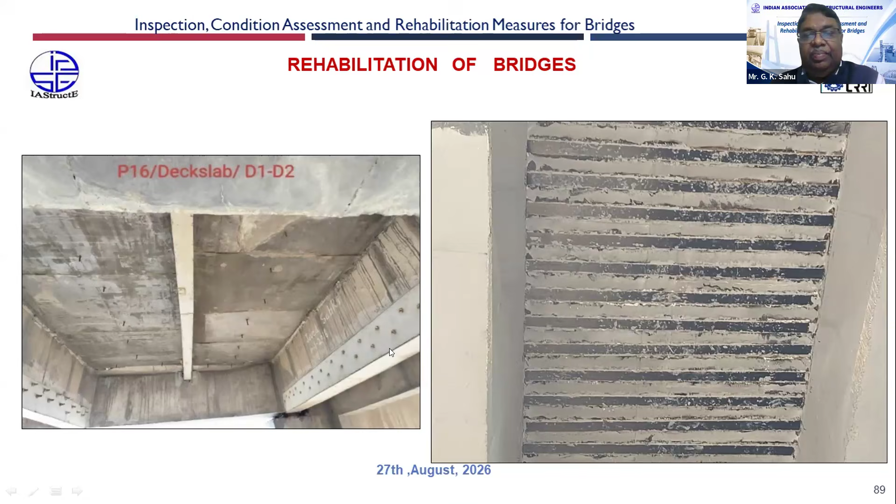So I request all the engineers, if they have this type of support in their structures, kindly look for these cracks across the width and across the thickness both, and have a good strengthening scheme at the proper time. Otherwise, someday that bridge will definitely collapse, because they have not designed for this high load prevailing at present - as I've shown, trucks are carrying 1.5 to 2 times the load carrying capacity allowed.

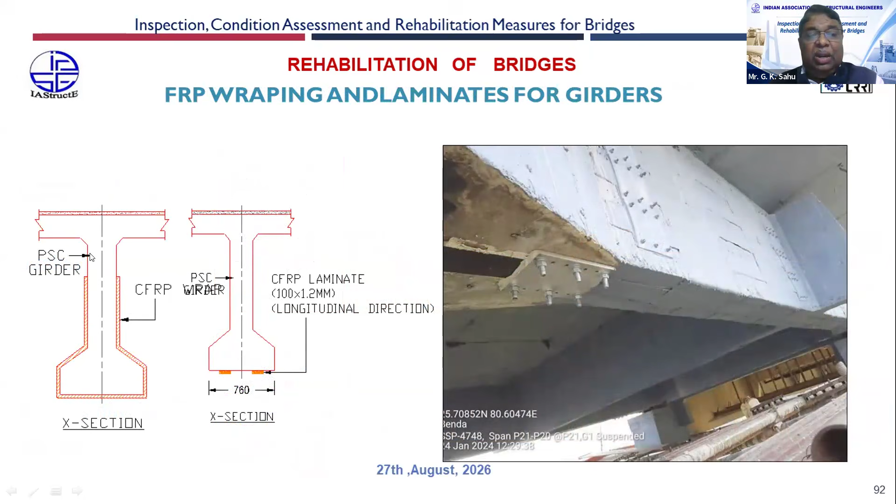So it is very difficult actually for that load. To overcome that, the proper strengthening work should be there, jacketing should be there, laminates should be provided, FRP laminates, so that it can be saved. Say girders or cross girders, you can provide laminates at the bottom for flexure, and FRP wraps you can provide at the shear zone. So this should be done, but at the proper time actually.

If we are too late, then the total cost will also be too much. You can see this type of structure, but after rehabilitation in time, you can have a very good look also by doing this rehabilitation work, and it will enhance service life. So take these things in proper time.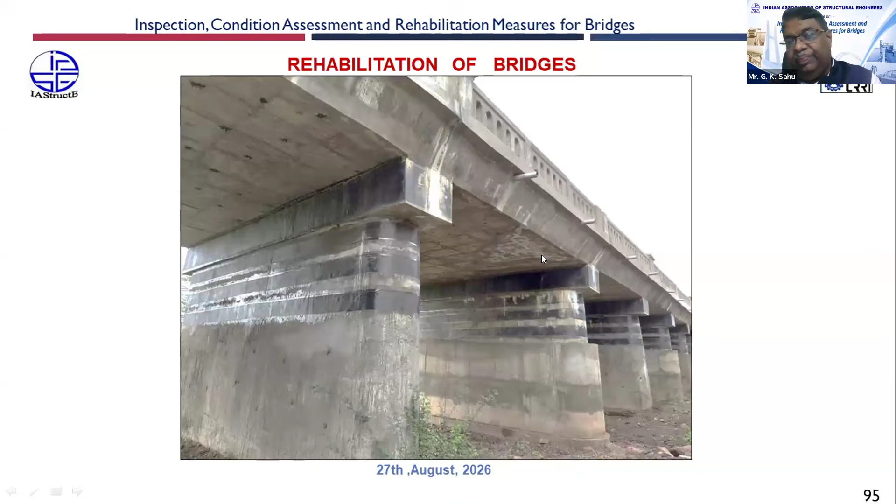Yeah, I am requesting, for this type of structure, let us have a look as early as possible. Otherwise, this may lead to collapse due to anything. Number one is structurally, from this one. Number two, their rollers are in the critical stage, and it will go in the river with any push from the heavy trucks. So especially we have to take care of this structure.

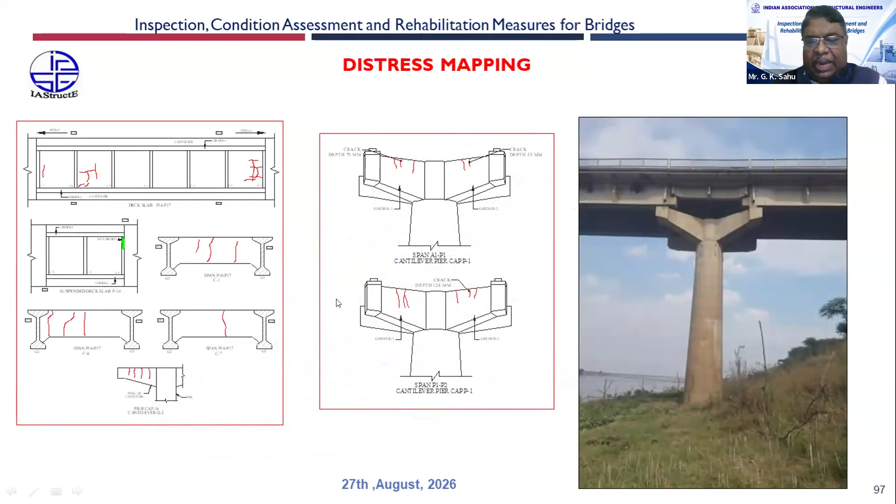So this is distress mapping actually. Whatever the cracks, whatever the distresses we are seeing, we should have in a map, in drawings. So crack mapping should be there. Yeah, for this slab you can see so many cracks. During inspection, you have to take some dimension measurements also for girders, for bearings, so that whatever replacement is required we can have, and whatever calculation is required we can do if dimensions are there.

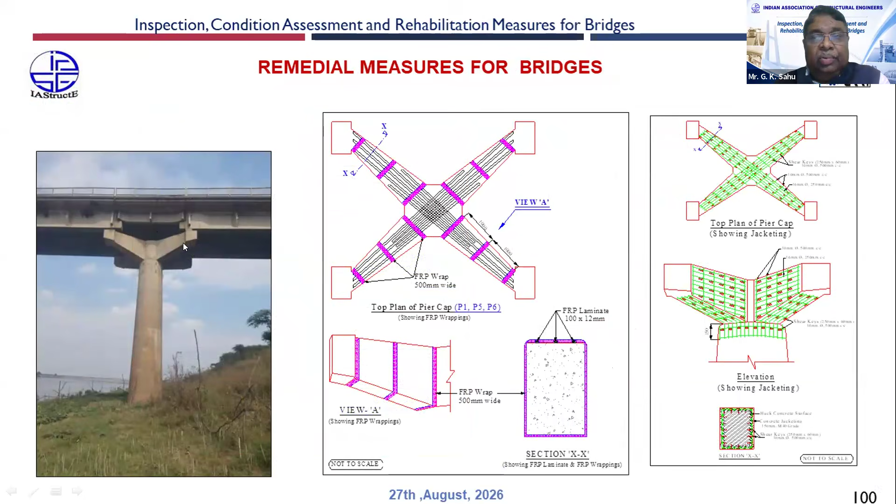Yeah, for this type of structure, we have to have jacketing as well as laminates, both laminates and FRP wraps also, so we can have good strength. Yeah, this is another way for cracks. In box girders, you will find so many cracks on the structures. You have to have FRP, and we can provide this type. You see, so many cracks are there.

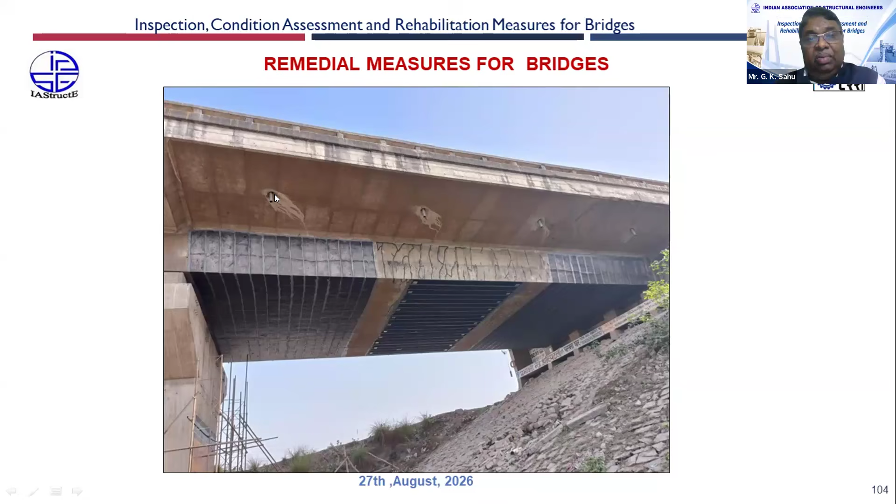That is first pressure grouted, and then laminates for the length at the center, and at one third you can put your wrapping system, FRP wraps. And this drainage spout, we have to have at least half-meter projection. Sometimes, if it requires more, we can go for external prestressing also. So that is there.

Yeah, you can have both FRP wraps as well as external prestressing. It depends on what the requirement is for the strengthening work. So you can see wraps also and FRP. Yeah. So this type you can see afterwards.

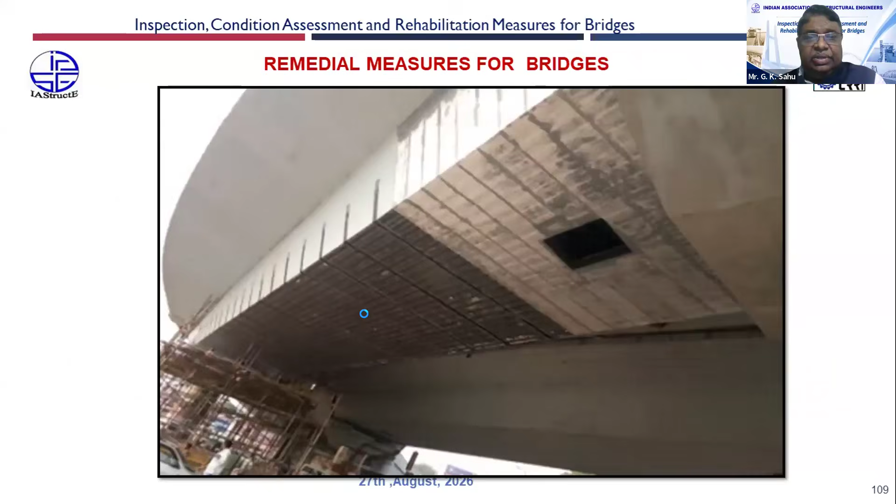This is another way of inspection. We can have a structural health monitoring system also. So many bridges were instrumented earlier, and some instrumentation work is going on. For all these 9 parameters we can have sensors and find out these parameters: strain, stress, temperature, deflection, lateral pressure, tilt, crack width, corrosion, acceleration. We are having sensors for all of these.

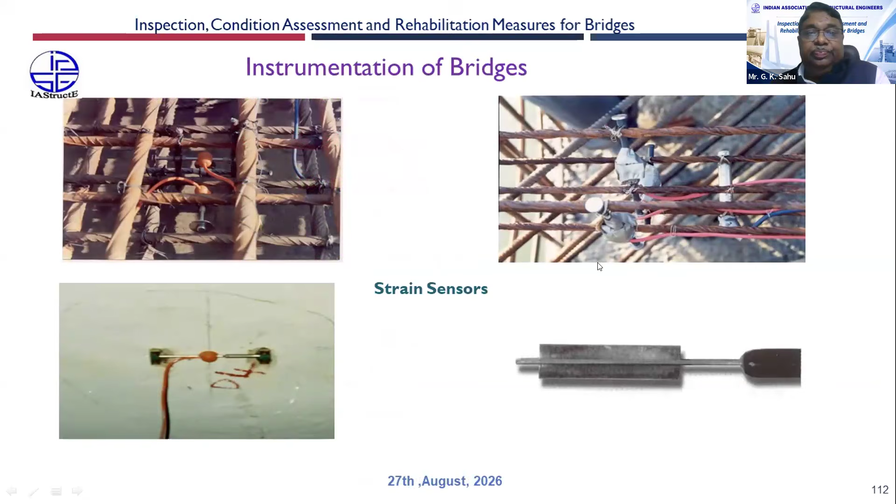This can be installed at the appropriate place. You can see this is the embedded strain gauge. This is the surface mounted strain gauge. This is a weldable type strain gauge; if a steel structure is there, you can have this one. You can put sensors in different orientations so that we can find out strains in different directions also. So this is some view of the strain sensors.

Yeah, this Varanasi bridge, Ganga bridge, which is known as Vishwa Sundari. This was instrumented long back, 1990 to 1995. In that era, a very beautiful bridge, having good instrumentation: well foundation, pier, superstructure, all instrumented for one span. So you can see any parameters.

Yeah, to know the temperature gradient and maximum temperature during hardening, this type of temperature sensor installation was done during construction in the year 1993. And this is the first instrumented bridge in India.

It was started in 1990 and the construction activity took place over 5 years. So in 1995, the whole instrumentation scheme was implemented. It has to go with construction activities only, so we have to wait for every stage of construction before putting the sensors.

This is temperature gradient. In the codal provision, the temperature gradient allowed is 20 degrees and maximum temperature is 70 degrees centigrade. But I request all the engineers, if your thickness is more than 2.5 meters, you should have very good control of your concrete mix. You should go for ice-cooled concrete and for steam curing.

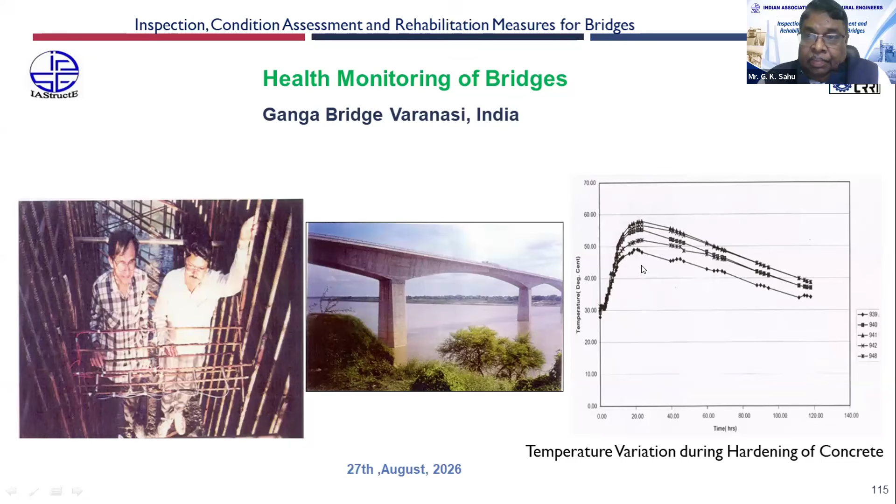Otherwise, both the provisions provided in the code, that temperature gradient should not be more than 20 degrees and maximum temperature 70 degrees, will be violated, if thickness is 2.5 and we have not taken care of ice water for making the mix and steam curing.

This is some result actually. You can have very good results if you put some sensors. These are the sensors put across this twin cell, and sensors were put at different places, and you can have a very nice graph. Within 3 to 5 years, you will find shrinkage and creep variation. Thereafter, we will find that the strain graph will be stabilized, so it will go parallel. Only the climatic condition changes will be there.

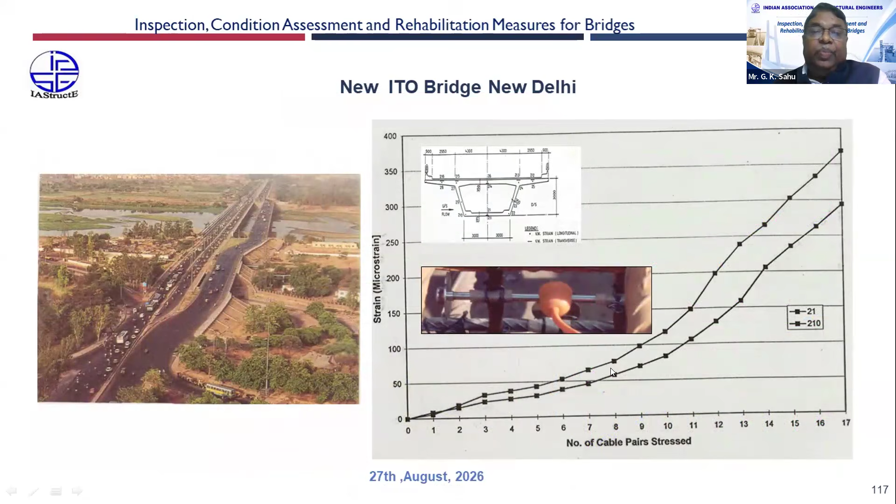This is just a single cell box girder, strain variation during pre-stressing. There were 17 pairs of cables, and how the strain varies is shown here after pre-stressing of each pair. So you can have good data to compare with the design parameters, which will come through instrumentation only. You can have what is the maximum temperature gradient. For that, you have to see the temperature profile shown by different sensors.

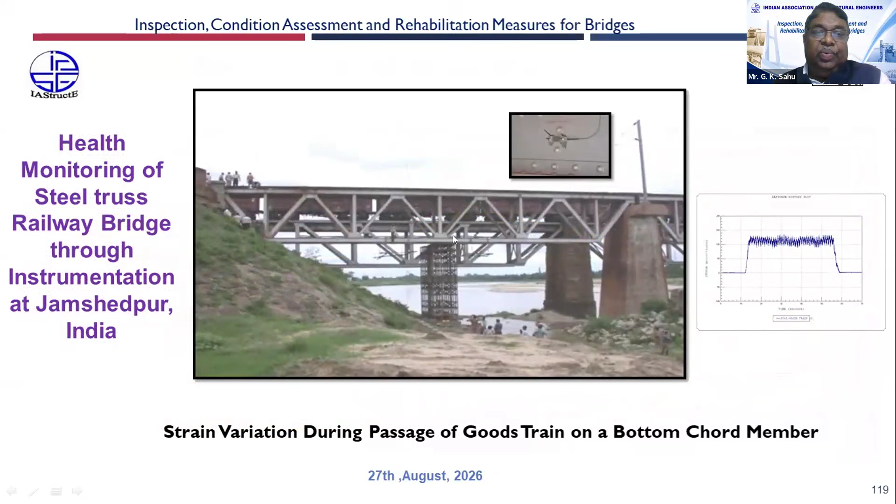You can study the behavior of any steel structure well by putting some strain sensors, some accelerometers, and some displacement transducers, and you can find all these parameters. So instrumentation is giving very good support for new designs, and you will find so much data.

Then you should use a database management system also for the instrumented bridges. It is very easy to handle with a database management system. You can see any result of any component, whether the well foundation, well cap, pier, etc.

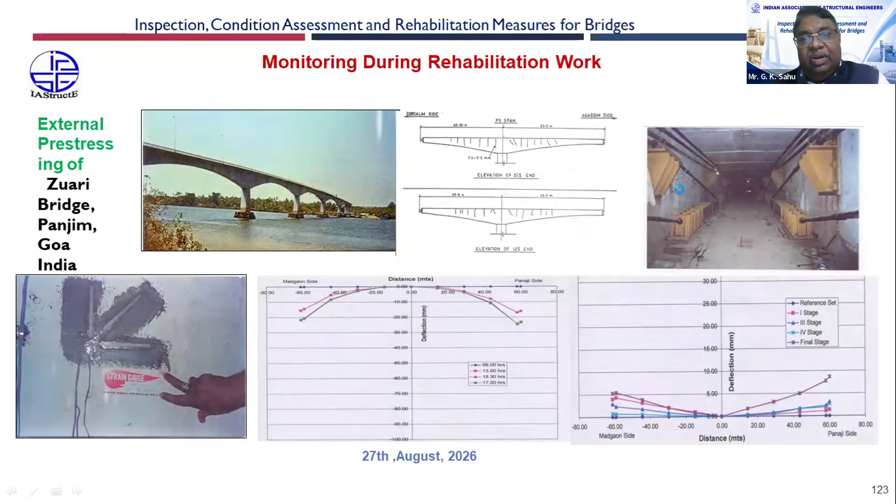Through instrumentation you can monitor whatever external rehabilitation work is going on. Say here, external pre-stressing work was going on for this Zuari bridge. So there the strain, deflection, etc. will be monitored after every stage of pre-stressing. That can be done only through instrumentation.

So actually the main thing, if you want our structure to last 100 years, before opening the structure there should be a structural safety audit, so that whatever defects exist in the structure can be known at the beginning and rectified. Then we have to launch Mission 2026. I will tell what Mission 2026 is in the next slide.

This is Mission 2026. There are 11 points. If we follow these 11 points, our structure will definitely sustain 100 years. That is guaranteed. The first one is very easy: clean and maintain drainage spouts. This is very easy to maintain, but it contributes 50% of deterioration of the structure. Clean and maintain expansion joints.

You see, these are the two things which give weathering action on the structures. That's why I am telling there is only one line for maintenance: there should be no interaction between water and the structure. And that can be done through good drainage spouts and maintaining the expansion joint seals properly. If you can do these two things, your structure will definitely go above 70 years.

Clean and maintain water logging on the deck slab. Sometimes you will find, whenever there is some rain, water on the deck slab. Concrete is a porous material, and if water is there, it will definitely go down and rusting will take place in the main reinforcement, pre-stressing cables, whatever.

Clean and maintain the excessive dead load. If you go and see the depth of BC, you will generally find that if the age of the structure is 30 years, there are 4 or 5 layers. Means you add 50 mm thickness every 5 to 6 years. So after 30 years, you will find it is around 200 to 300 millimeters.